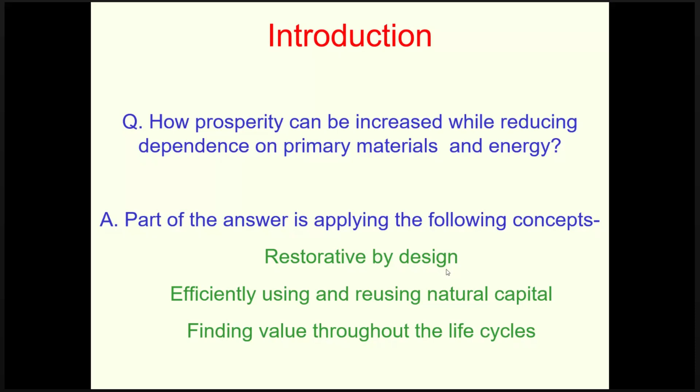Part of the answer is applying the following concept: restorative by design, efficiently using and reusing natural capital, finding value throughout the life cycle. If we go into the detail of this, we can say it is not just avoiding failure. We have to regenerate the systems. Each failed bridge is a missed opportunity to heal. The next can model how infrastructure serves both people and the planet. What I mean to say is that we need to learn.

Second point, we can say beyond prevention towards resilient, resource-conscious design. Analyzing failure supports a transition to sustainable infrastructure grounded in an efficient use and reuse of the natural capital. This includes whether we can strengthen the bridge, whether we can upgrade the bridge, because failure does not mean it has to collapse. Failure means if a bridge or any structure has become unserviceable due to a change in the criteria or a change in the load, then we need to take some other action and make it usable.

Third item can be failure as a feedback loop for life cycle optimization. Insights from failure optimize every life cycle phase, unlocking technical, economical, environmental, and educational values. So we have to learn from the failure and prevent it, and again learn from the failure, and then keep doing it in the cycle at every stage of the working.

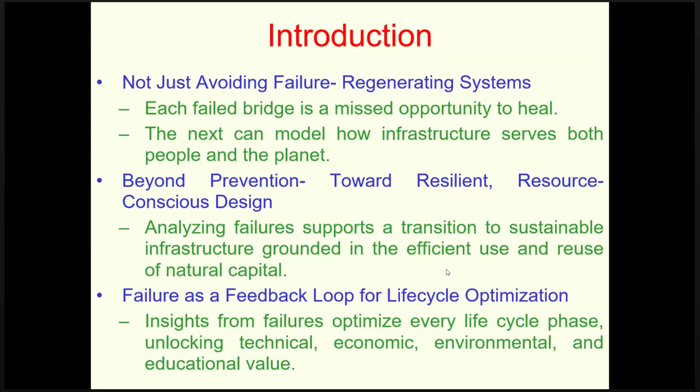And now let us dive into the... I again request you to mute. This action has to be prompt.

Now, lessons from bridge failure may be treated as a learning experience, because when a bridge collapses, it has certainly been pushed to the limit in some way. Deficiencies that may be found in bridges are numerous. This includes uncertainty in the load carrying capacity. There are examples where, because of inadequate estimation of the load, a bridge has failed. Damage to bridge members due to accidents. These accidents can happen when the bridge is in service or when the bridge is being constructed or erected.

Excessive loss of the member cross-sectional area due to corrosion. We have examples where there has been loss of life and collapse of the bridge due to corrosion. Several examples are there. Inadequate geometric clearances. Depending upon the dimension of the moving vehicle, what we fondly call moving dimensions, if there is any infringement, there is a possibility of bridge failure, or at least failure of a member, hitting, or some loss of life.

Another reason could be foundation deficiencies. It all relates to the estimation of the scour index, type of foundation, estimation of the water, channel width. So many things are coming. So they are one of the reasons. Now, if you remember, last year we had several bridge collapses, several bridge failures almost during the entire monsoon season. And this year also it has started, with one bridge failing somewhere in Uttar Pradesh, the slab due to concrete collapse, very recently, a few days back.

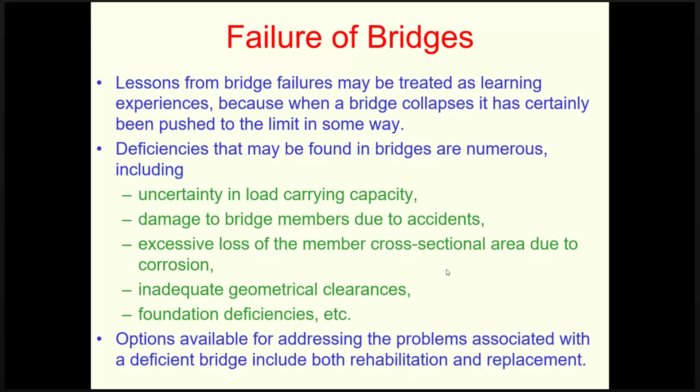Now, options available for addressing the problems associated with deficient bridges include both rehabilitation and replacement. So we need to think, that is what regenerative is. Unfortunately, in India, we are shy of doing analysis related to bridge failure. We are very shy of cataloging it. But in the US, they have made a lot of studies, and I have been forced to take examples from those studies from the US.

M. E. Thiel et al. made one study in 2001, and they found out nearly 40% of the bridges in the US are structurally or geometrically deficient. Just imagine, in the US, 40% of bridges. Some of the deficient bridges are in service with speed and/or load restrictions, and some are out of service.

Another study done in 2012 shows that on average, one bridge every month failed during 2010 to 2012 in the US. See, the US became a developed economy long back. They have a long history of building bridges and infrastructure in their country, and because of that, the age of the bridges is quite substantial. That is one of the reasons for this type of failure. And we are also now approaching that level.

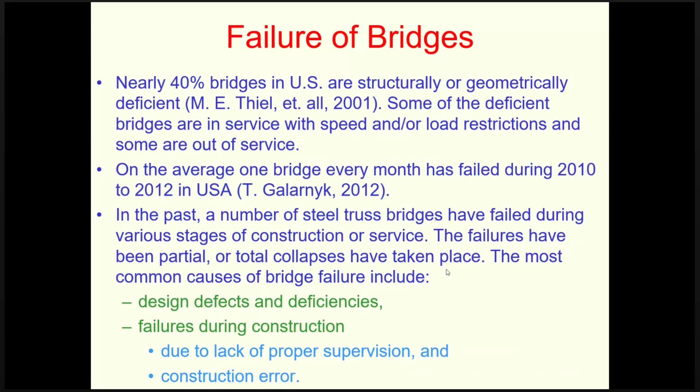Failure of bridges can also be due to long-term fatigue and fracture, over-stress of structural elements, accidental impact from a ship or a moving vehicle below the bridge in case of ROB, earthquake, lack of inspections, and unforeseen events. Again, for truss bridges, the most common failures are failure of the gusset plate connecting the members of a truss and buckling failure of compression members.

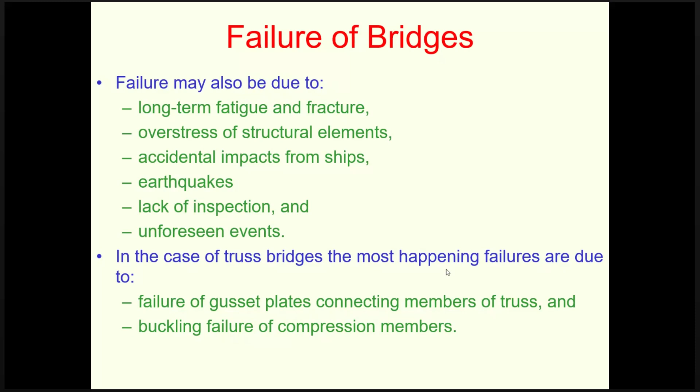Again, one analysis from the US, out of 347 bridge failure case studies over a vast period of say 600 years, found 10% of bridges failed due to overloading. Out of 164 failed metallic bridges, case studies of 87 bridges were classified as collapse, and the most frequently encountered modes of failure are scour of pile, pier or foundation, buckling, fatigue, impact, and fracture.

You can see that foundation failure is roughly 17%, buckling is 16%, fatigue is 13%, impact is 13%, and fracture is 9%. This is roughly around 70%. The remaining 30% can be other reasons, but they may be numerous. Another analysis: out of more than 6 lakh bridges in the US, more than 1,000 bridges failed during 1980 to 2012, out of which 29% are truss bridge failures.

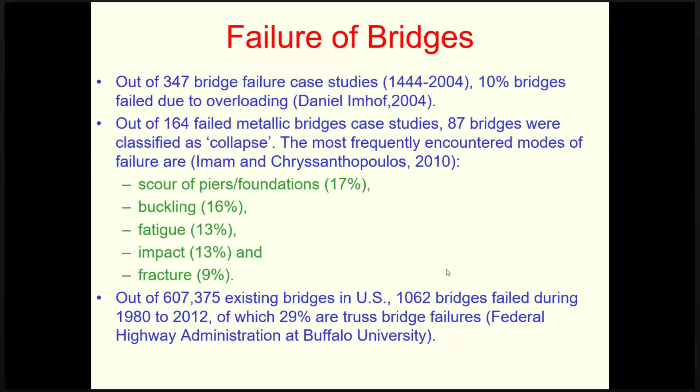So why am I giving so much emphasis on truss every time? Whenever it is a steel structure having a larger span, we invariably go for a truss. That is why we have to be very, very careful about trusses. Now let's talk about a few historical case studies that are relevant. One is the Silver Bridge in the US. It failed at the age of 39 years. It is a suspension bridge.

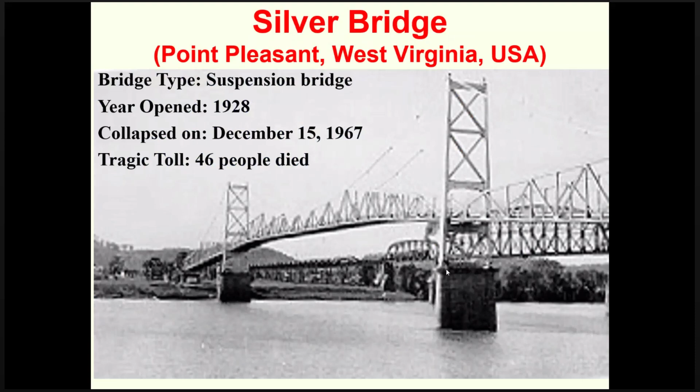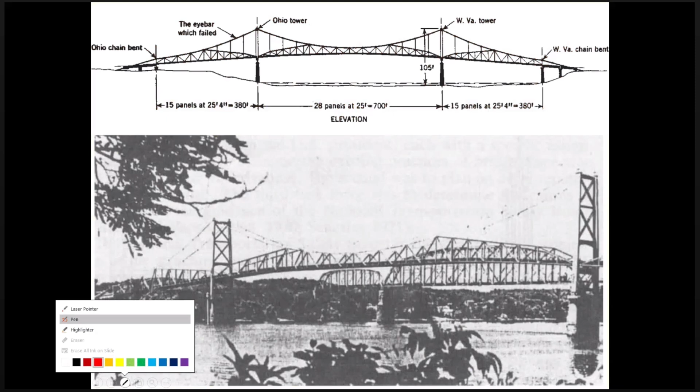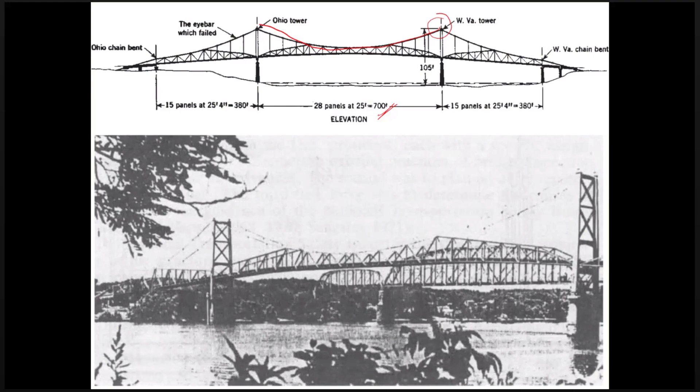The bridge has a suspension. This is the suspension cable, and it is a big span, around 700 feet. Right now, this is the collapse picture of the suspension bridge. Now, what happened in this? In the suspension, you suspend the wire with an arrangement having a key, one eye bar holding the tower and the suspension cable. The catastrophic failure was of a single eye bar in a suspension chain due to stress corrosion cracking.

The biggest enemy of steel structures is corrosion. When steel is subjected to high tensile force, the corrosion extends beyond limit and failure happens very fast. So rust in the eye bar joint caused the stress corrosion crack. Then fatigue failure: high stress and low temperature in that region made the structure brittle, and the loading standard kept increasing over the years. So the loading cycles increased and combined with the fatigue problem.

Another issue is related to inspection: an undetected internal flaw, just 0.1 inch deep, 2 mm or so. That crack was there at the eye bar hole, and finally from there it separated out and failed. Now the biggest problem is no redundancy. One member fails, one joint fails, the entire bridge collapses. So from the design point of view, there should be built-in redundancy, so that if a member fails, other members are ready to take the load.

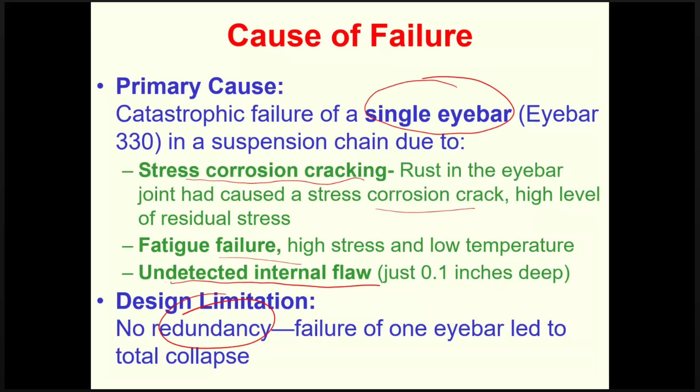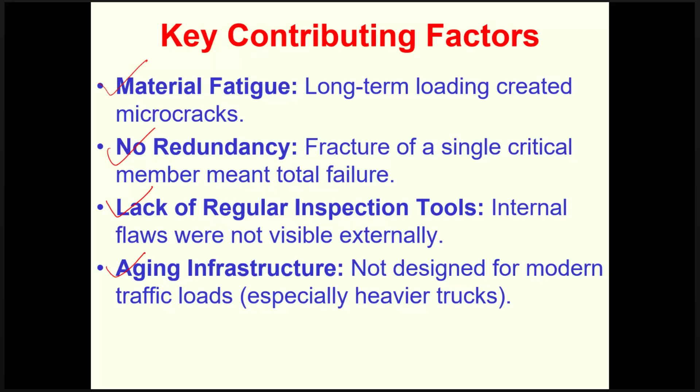Contributing factors are material fatigue, no redundancy, lack of regular inspection, and aging infrastructure. We are somewhere at that 41 years or so; we have already crossed that limit. The lesson learned is that non-redundant design is vulnerable, so there has to be built-in redundancy. Routine non-destructive testing is needed for aged bridges. Then the inspection protocol is to be decided.

When we are doing NDT testing, what shall be the inspection protocols when we say there is a problem? And that led the US to create a National Bridge Inspection Standards in 1968. Fortunately in railways we have laid down inspection procedures, but when it comes to NDT, that is still to be laid down, and we should have expert agencies available who can do it.

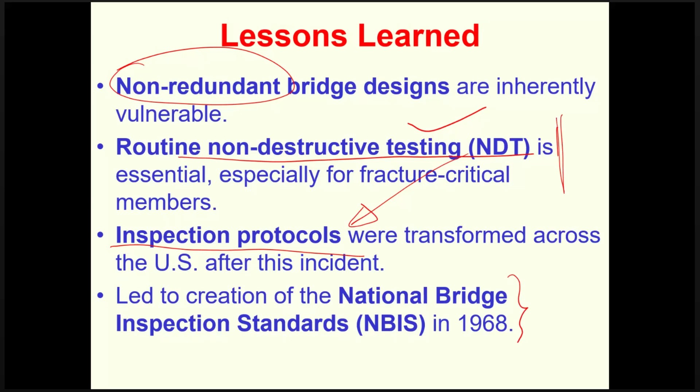Another example we can take is the Quebec bridge. It was conceived as a cantilever steel bridge. It collapsed in 1907, and there were casualties. A second attempt was made, and again it had some problem, and there were 13 fatalities in that. After that, the second attempt continued, and it was completed in 1917. So you can say that it took 10 years.

Now the most important aspect here is that the cross-sectional area of the members in the second attempt is 2 times that of the first attempt. The interesting point here is that the first attempt was a private affair. A consortium was formed having various stakeholders. It was privately funded, partially government funded, privately controlled, but when the second attempt was made, it was purely a government affair.

The difference is that in the first attempt, they tried to economize to the extent that they estimated a lower self weight, they permitted abnormally high allowable stress, they ignored the distress signs in order to complete the bridge, and the designer never visited the site. There was no system of proof checking. In fact, it was objected to by the designer, saying that he would become subordinate, so no proof checking.

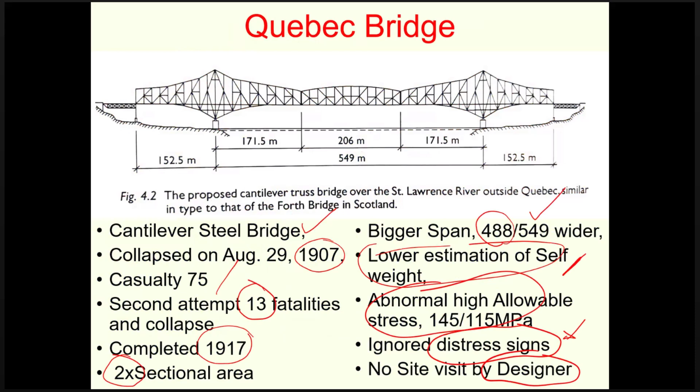So that all made a tremendous mistake. So copy-paste of design, no process of proof checking, over-economizing the sections, these are the main problems. Another issue here is that the warning signs, the distress signs at the site reported by the workers, were thoroughly ignored, saying that the engineers had taken the decision and it was not worth looking at.

Now, now I request you to mute, please.

The main distress sign there was out-of-plane bending of a bottom chord. It was somewhere around 20 mm, and within 2 weeks it increased from 20 mm to 57 mm. First of all, this 20 mm out-of-plane bending is like buckling. So that sign was neglected in the compression member, which increased as the structure was built, from 20 mm to 57 mm, and finally it collapsed.

The second problem is that the rivets in the transverse bracing began to shear off. As the buckling increased, shearing of the rivets took place. That was also neglected. Then a message was given to suspend the work, but that was ignored because they wanted to do the work as fast as possible. Under pressure, the construction continued and then it collapsed. On 27th August the suspension message was there, and on the 29th it collapsed. So it did not give much time.

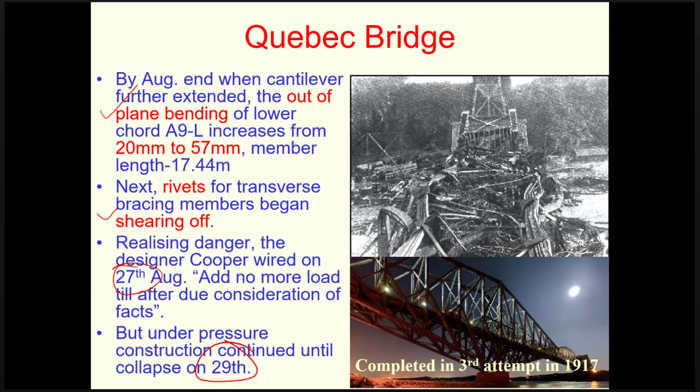So what are the lessons learned? Underestimation of self weight, buckling of the compression member was ignored, then overstressing because of the increase in span length; overstressing of several members was ignored. It was not actually discovered. Later on, when it was pointed out, there was no time to do anything and rectify all these things.

Then during erection, whatever distress signs were there were ignored. That means precise instrumentation is required, so that you don't say the alarm is being raised by unqualified persons. If you do instrumentation, you will not have the problem. There was no proof checking, so there has to be a third-party proof checking system.

No site visit by the designer and poor communication. See, in those days, communication is taking a lot of time, and when the communication is coming through the various channels, like stepping from top to bottom or from bottom to top, it increases the time of communication and action taken. So that may result in the fatalities and the collapse of the bridge also.

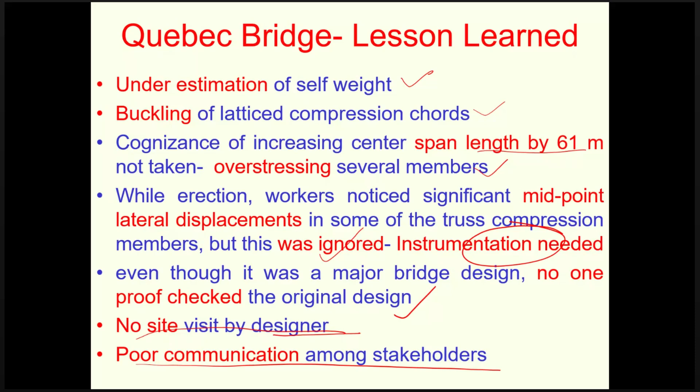Another quick example, after that I will close, I believe. Next speaker may be on the line.

This is a case in India. It is the collapse of the Chauras bridge. It is a road bridge, but the interesting point here is that it is again a truss example. You see, it is a 3-span continuous bridge. Now, if you see this photograph where it has collapsed, you see it has been lifted in this manner.

So if you look at this location, from there it has lifted, and if you look at this end, this is at the abutment, and there also the extreme end is in lifted condition. So what does it simply mean? What happened when the load is applied here? It deformed this way. That means at the end there is no restraint provided against the lifting of the end of the superstructure.

Now, had it been visualized, or had a holistic view been taken of how the structure will behave, this type of mistake would never happen when we are looking at a 3-span continuous bridge, because this is a very fundamental thing we can visualize. When the central span is loaded, the ends will be lifted up. So what is the lesson we have to learn from here?

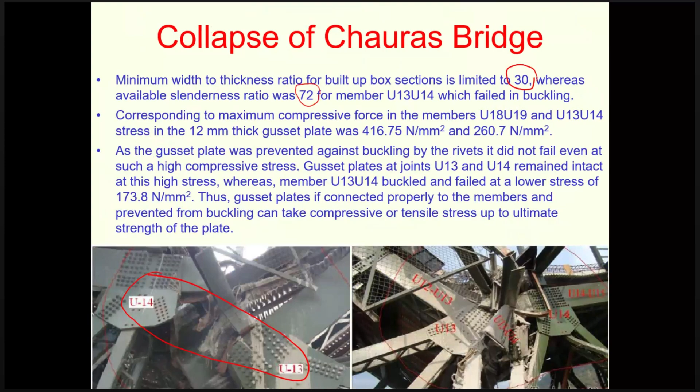Construction sequence. If we go to this bridge, here the construction was started in the middle. If we do construction somewhere here, slab construction, then it will add to the weight. If you do construction here again, it will add to the weight so that the structure will be more stable and the central span will have less buckling forces. Anyhow, that construction sequence needs to be defined in writing properly.